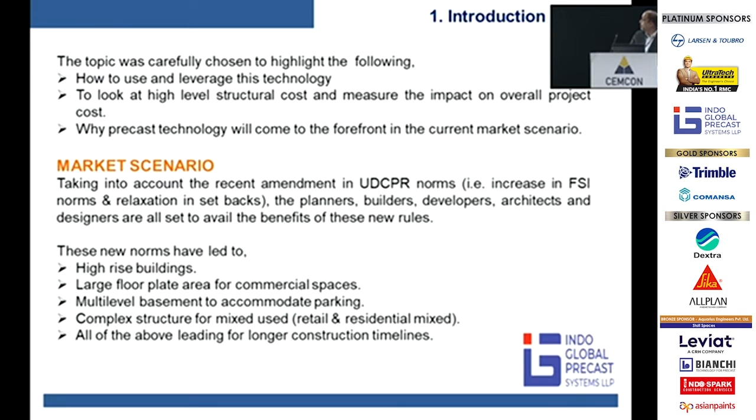Multi-level basements or multi-level podiums for parkings are being developed. Complex structures of mixed use, as retail and residential. These are also a type of buildings that you can see now. And all of these above are basically leading to longer construction timelines. We've also seen that the market is very volatile now, steep inflation, rise in price of steel, concrete, cement, aggregate, strands. The labor costs are also increasing.

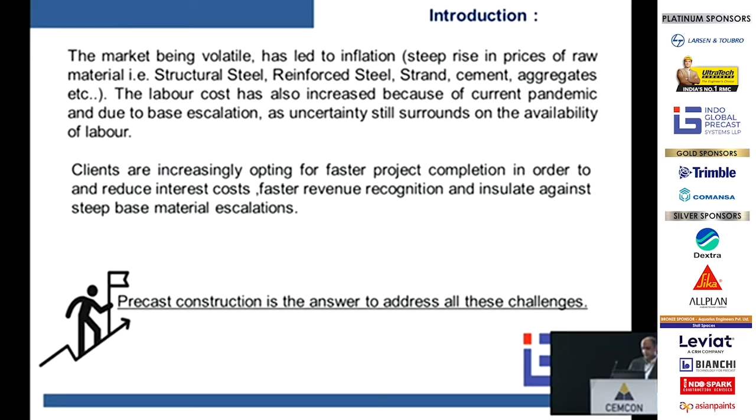And all these are leading to pressures on the clients. Clients are now opting for faster completion of projects in order to reduce interest costs, faster revenue recognition, and also in a way to insulate against base escalations. Another change has been RERA as a regulation, which has a fair amount of bite, and timelines are becoming more and more critical for everybody now. We've tried to show how precast can be leveraged by a couple of case studies.

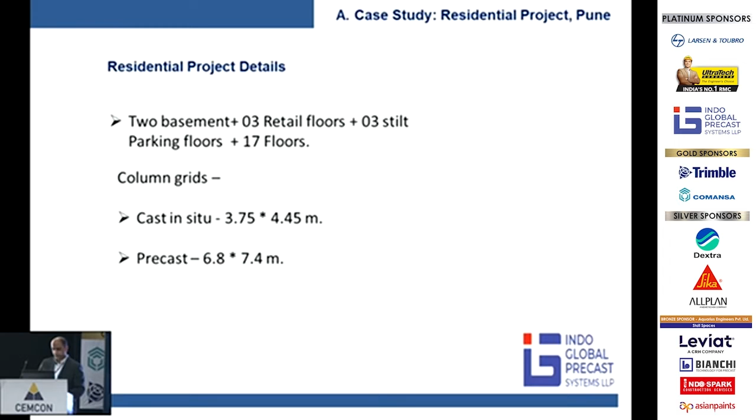The first case study is for a residential project. This is 2 basements, 3 retail floors, 3 stilts, and on top of that, 17 floors of residential. So this is the mixed-use buildings I was talking about. So earlier, the column grids were designed at 3.75 to 4.45 meters for in situ construction. For precast, we've changed that to 6.8 to 7.4. Now, this is a live project, and it's currently under design.

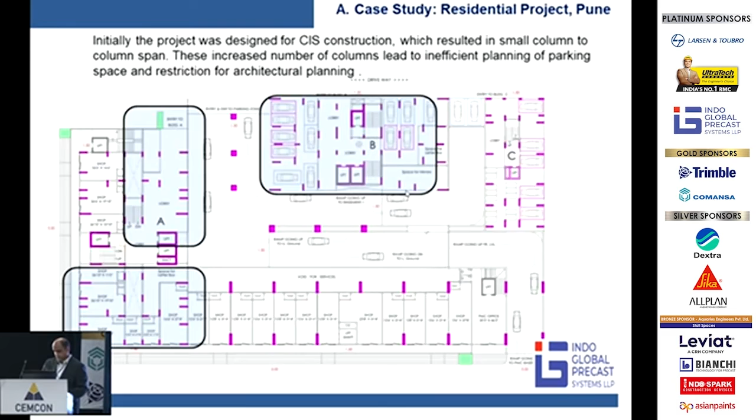So this was the original plan for the in situ construction. Now, we've highlighted the areas. So basically, these are the areas where columns for the residential buildings are coming down. And this is the retail component. What you can see is that this leads to a fair amount of inefficiency in dead spaces being created, limitations on the ramp locations, and also loss of a lot of built-up area. This is the structure above, just for reference.

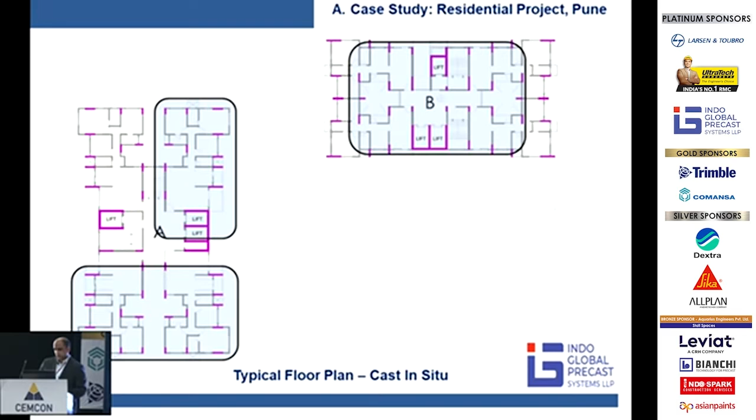We've taken this under precast, and the builder or developer is a friend of mine, and he approached us saying that something is wrong, the construction area is going out of whack. So we later on proposed a precast system for him, wherein we were designing it with a 6.5, 7 meter span. We were able to optimize the parking spaces, the parking built-up area, also planning it on a 6-meter grid gave him a fair amount of flexibility on the retail space as well.

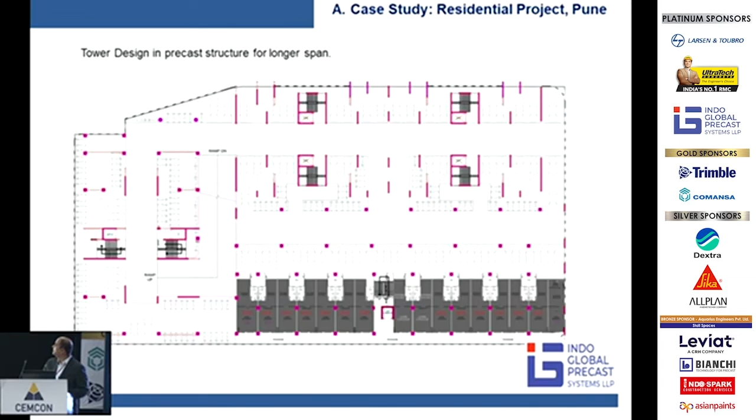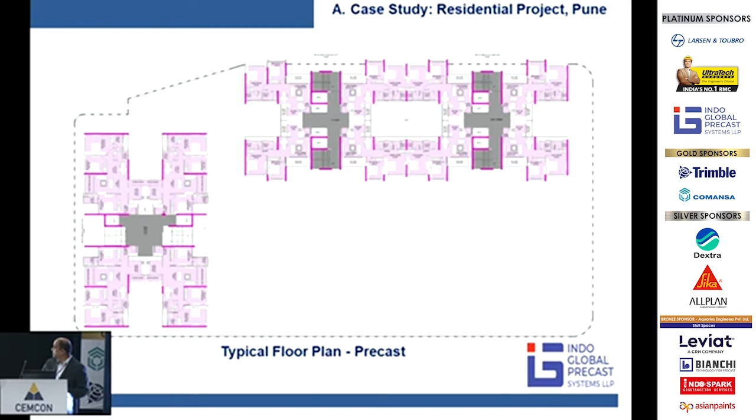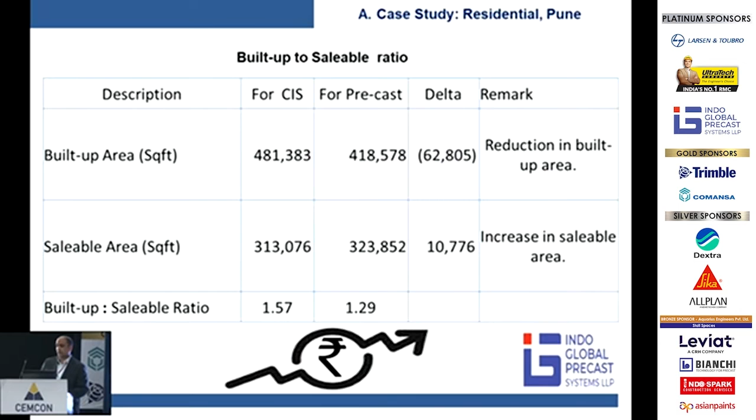And the overall saleable ratio went down from 1.57 to 1.29. Just a rough material consumption. Concrete consumption was 0.03 in cast in situ, very similar in the precast building. For reinforcement, it was 3.5 to 4 for a cast in situ; it will move to 3.2 to 3.5 for a precast. This 3.2 to 3.5 would include the strands in the hollow core slabs.

Overall costing for these buildings, with reference to cast in situ and precast, just to show you a cost behavior: the cast in situ building would cost up to 650 to 750 rupees a square foot. The precast building, yes, would be a little more expensive. It will go to 750 to 850 rupees a square foot. Another point to bear in mind is that the precast building will also include a fair amount of brickwork, blockwork quantity on the external sides, close to around 25%.

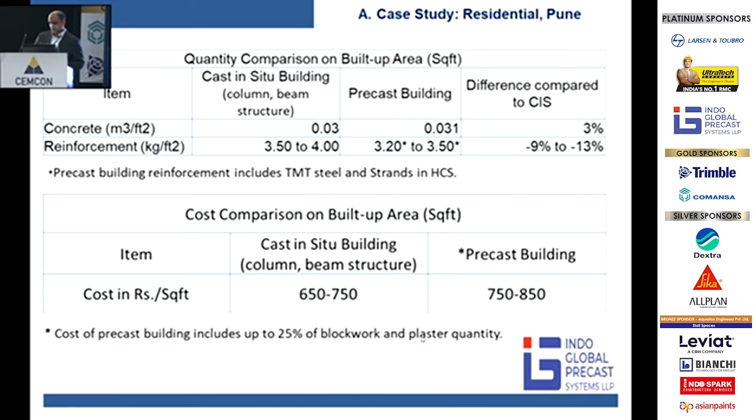I'm sure there will be a lot of questions, so I've taken the liberty of trying to predict a few myself. So the first question that we thought we might get is: is the same percentage area reduction applicable in all projects? Well, no. You will not have the same percentage reduction in all the projects. This is a complex mixed-use project, so there has been a fair amount of area optimization, but this would depend and vary from project to project.

What is the overall impact of precast structure on overall building cost? Pure construction versus overall product cost. So what we believe, and we'll see in detail later, is that looking at all the other benefits of precast, we should get a very similar costing, at least equivalent costing. What is the slab cycle that can be achieved in precast structures? Well, for a structure like this, we can achieve 10 to 12 day slab cycles without too much effort or too much stress.

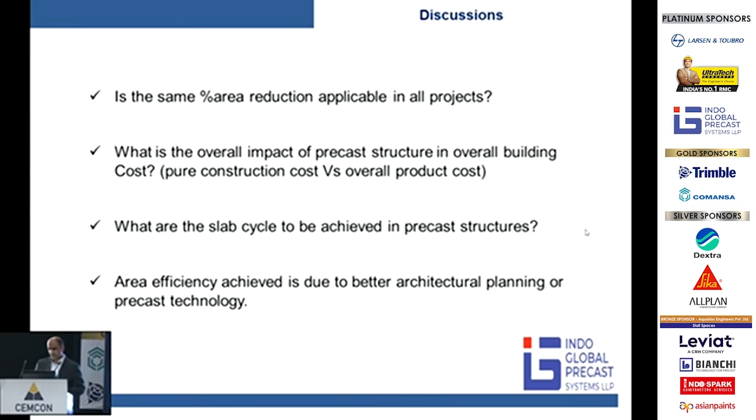And is area efficiency achieved due to better architectural planning or precast technology? I guess it's a mix of both. Precast will give you the option to design with longer spans, wherein it can help the architect achieve better efficiencies.

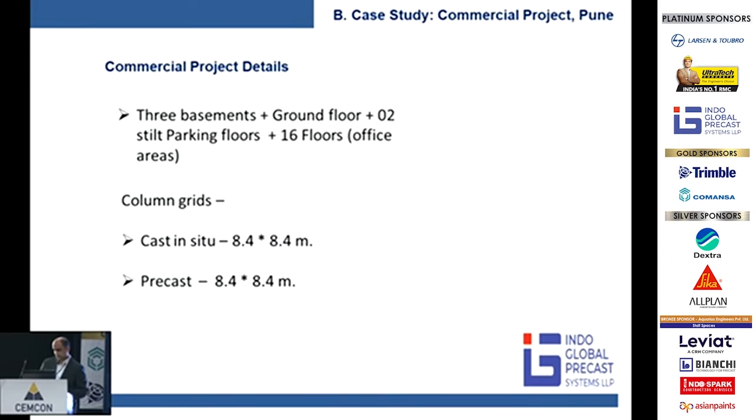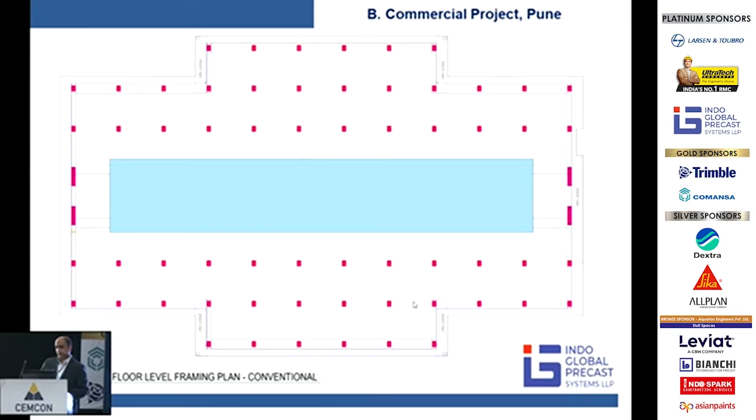The next is a commercial project. This is 3 basements, ground, 2 stilt floors, and 16 floors of office. The grids are the same for cast in situ and precast, 8.4 by 8.4 meters. Just to show you the floor plan. So this is a commercial building with 8.4 by 8.4 column span, central core, and an average of 2 to 2.5 meters cantilever along with a band beam.

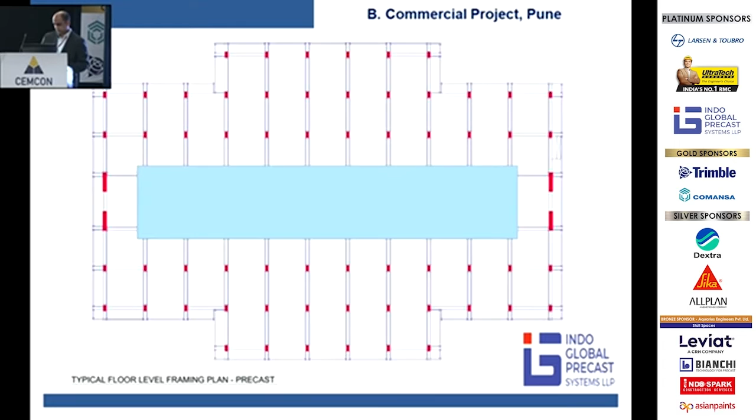This is the frame structure which we've done in precast, wherein there are unidirectional beams, outer band beams, and a certain amount of tie-back beams and framing beams for the cantilever portion. This is the basic behavior of the QS that we've seen. Concrete 0.04 for the cast in situ, whereas it's 0.036 for the precast. The reinforcement 4 to 5 kgs. Precast building we are closing in 2.75 to 3.5, and PT is 0.35 to 0.45 for the cast in situ. This increases in precast because of the hollow core slabs; it goes to 0.425 to 0.5.

You see a higher concrete saving in commercials because of the longer spans and larger size of hollow core slabs. So the larger the hollow core slab, the bigger the concrete saving. As far as the cost comparison is concerned, cast in situ buildings would probably finish between 700 to 800 rupees a square foot built-up area. Precast buildings would go up to 850 to 950.

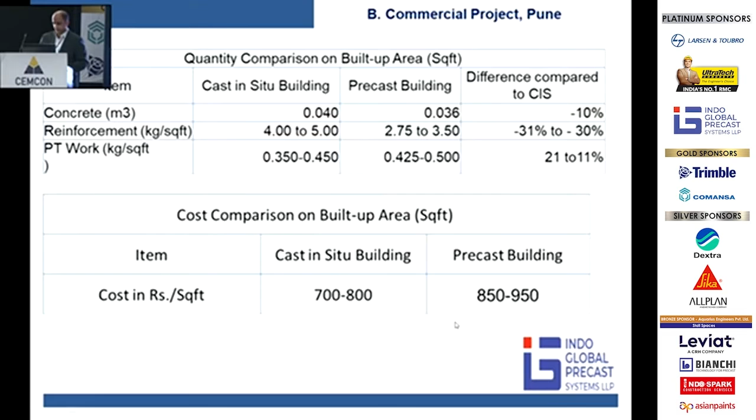Similar to the earlier slide, again, we have similar questions, such as what is the overall cost impact. I think we've covered that. Slab cycles achieved are also very similar. Can there be any efficiency area saving in commercial buildings? Well, at 8.4 by 8.4 meter grids, no efficiency can be achieved. Yes, the grids can be increased to 11 by 11, 11 by 8.5. There can be a certain amount of efficiency achieved in the parking areas.

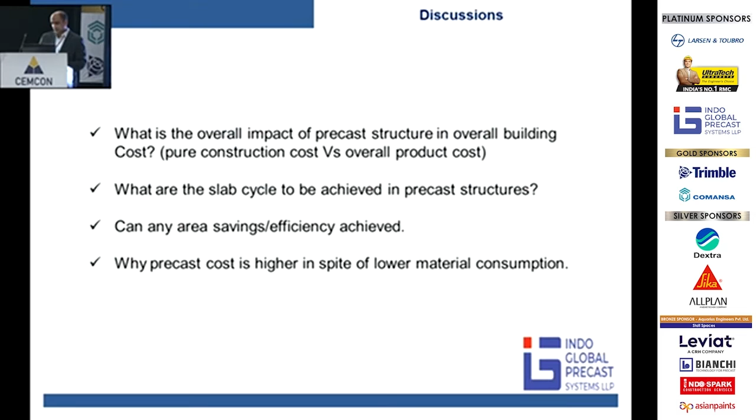Why is precast cost higher in spite of lower material consumption? Well, I guess a certain amount of it is due to the cost of technology, the cost of cranes, and also as precasters, I think we are yet to get into a factory environment wherein we are concentrating on production, and we are still stuck in a project environment. So I think we also have a big role to play over there. I think everybody's covered advantages of precast, so I shall quickly just take you through.

Speed, yes. Timeline reduction, you can get 30 to 40% savings. Lesser waste generated. The process is definitely immune to climate change; production does carry on even in the monsoons. Reduction in labor dependency, quality, safer working environments. Dependent activities in precast buildings can definitely start earlier, so an early start is possible for most activities which are on the critical path.

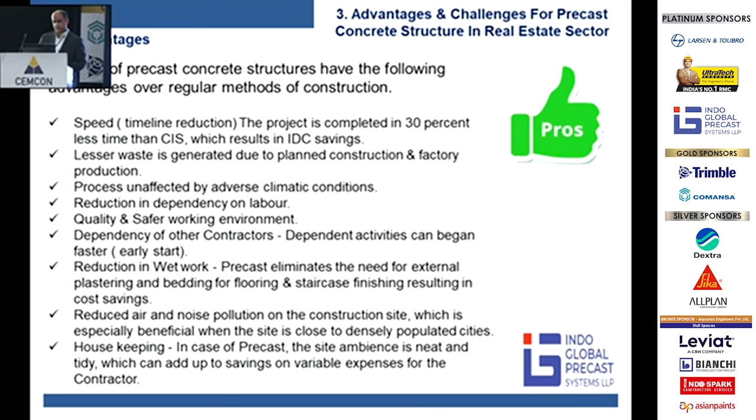Reduction in wet work is one major area which is also a big time saving and also good for housekeeping, where plastering, bedding for flooring in residential projects, and even staircase finishing can be eliminated and definitely help us in cost saving as well. Reduced pollution and housekeeping. There are some challenges that we face.

There is still a lack of consolidation in the real estate industry. What I mean to say is that our real estate industry is fairly unorganized, and a lot of construction does start without financial closure, which can lead to issues with the precast technology. Availability of higher capacity cranes; the population in India is not very high. Rental costs are still very high.

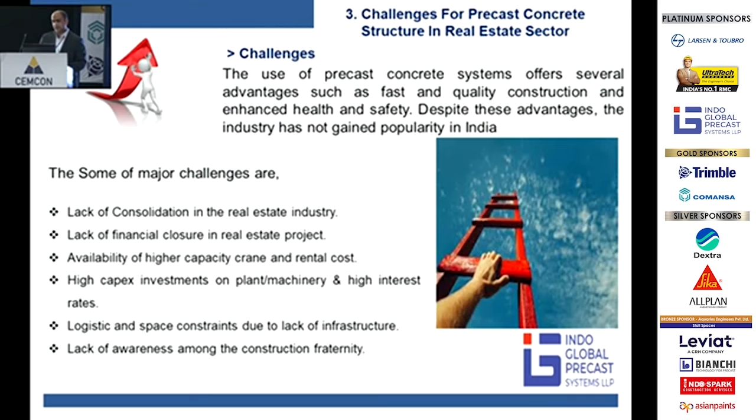High capex investment on plant and machinery, higher interest rates, where we are seeing a big drop, so that should be another big advantage for us. Logistic and space constraints due to lack of infrastructure is also an issue, and lack of awareness among the construction fraternity. How can we use and leverage this technology?

As far as residential projects go, use of higher spans to achieve a higher area efficiency is definitely one aspect which we've shown and can reap the benefits of. Reduction in wet work not only reduces cost, but drastically saves the overall project timeline. If external plaster can be eliminated, that is a big, big saving. Even bedding for tiling, brick bat coba for toilets: with good solid concrete slabs, there is absolutely no issue. You can directly move to membrane waterproofing and eliminate this activity, which is both time consuming and costly.

And speed. Speed definitely helps with your internal overhead costs, your faster revenue recognition, and basically to insulate yourself against any further inflation. So these are three ways we can use and leverage this technology to get an overall efficiency in cost. So even if the cost of a precast structure per se is slightly higher, we should be able to cover it up in the following areas.

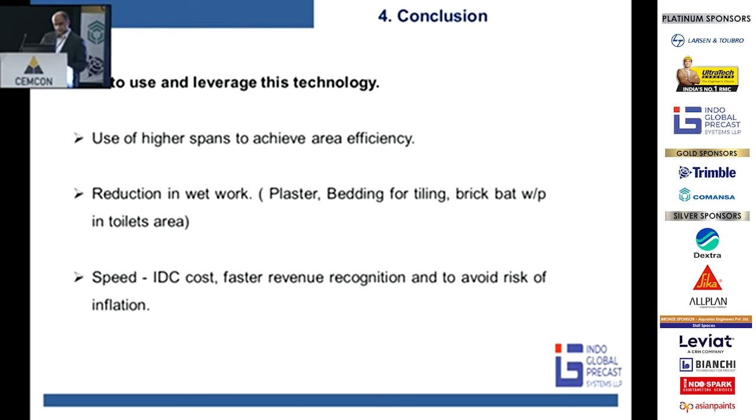To look at a high level costing, we've seen the cost of precast residential structures is anywhere from 10 to 20% higher than conventional structures. But this is just the structure cost. If you look at the overall cost, you have brickwork which gets offset, plaster which gets eliminated, bedding of tiling can be eliminated, staircase finishes can be done, timelines can be saved, and there's IDC reduction.

Further, be it residential or commercial, faster revenue recognition is a big thing. People have been quoting examples of starting rental 6 to 8 months earlier on leased buildings. That is a big, big saving and earning for them. And also inflation; we've seen huge inflation today. So if you look at the overall picture, we believe the overall cost should be equivalent or lower than a conventional structure.

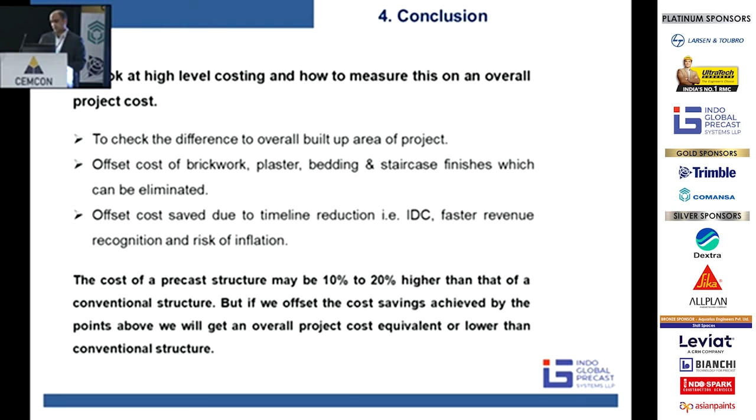And why do we believe this technology will come to the forefront? Consolidation is happening at a rapid rate. We have more and more organized developers now, and fair clarity on financial closures, so people are not starting projects without the funds to complete them today. Rising cost of labor and lack of availability is going to continuously bother us. Rising cost of raw materials, cement, strands: the more expensive these materials become, the more efficient precast buildings will be in comparison to in situ buildings.

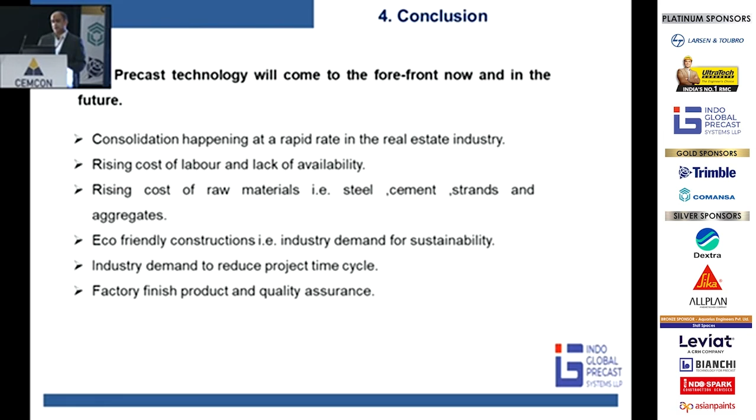Eco-friendly construction: there is an industry demand for sustainability. We're using less water, but we're definitely also using lesser steel, lesser aggregate, lesser cement, which would lead to more sustainable buildings. Industry demand for reduced project time cycle, and factory finished product and quality assurance, especially with legislation like RERA, which is forcing us to give 5-year warranties. I think this is definitely a major area of concern.

We are Allplan Precast, Allplan's global competence center for prefabrication. As our Design to Build motto suggests, we support you along the whole precast process, from the first cost estimate to the precast parts design and detailing, right up to generating accurate production data.

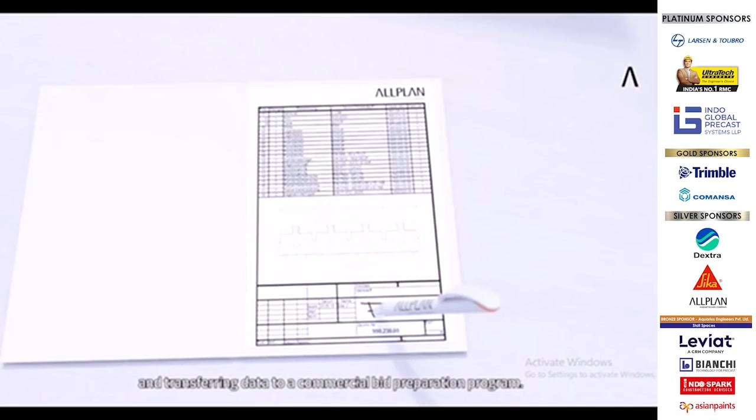With the model-based calculations within the Sales Manager, you have the tools you need to quickly and securely develop impressive bids. This sophisticated 3D model calculates volumes and quantities automatically from the building model, generating lists and graphical reports, and transferring data to a commercial bid preparation program.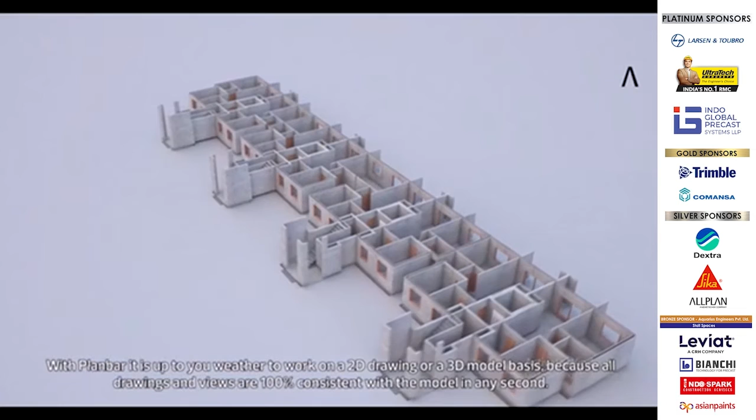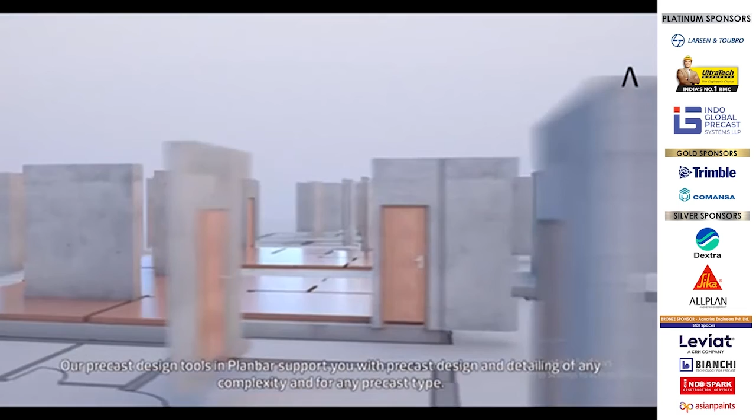PlanBar offers an ideal and unique synthesis of model and drawing-oriented work. With PlanBar, it is up to you whether to work on a 2D drawing or a 3D model basis, because all drawings and views are 100% consistent with the model in any second. Our precast design tools in PlanBar support you with precast design and detailing of any complexity and for any precast type. Numerous automated functions and integrated quality assurance enable optimum precast processes.

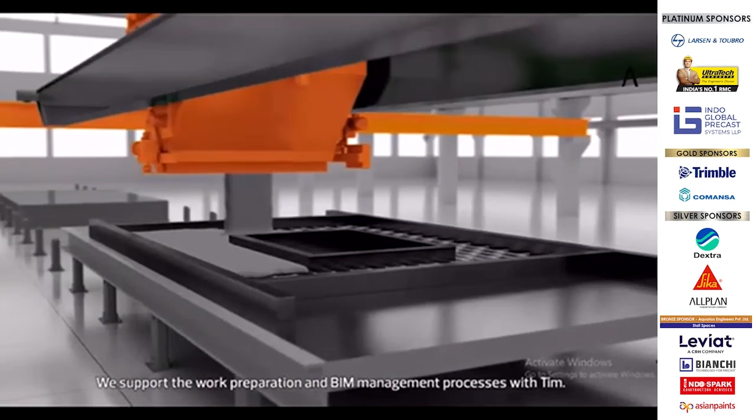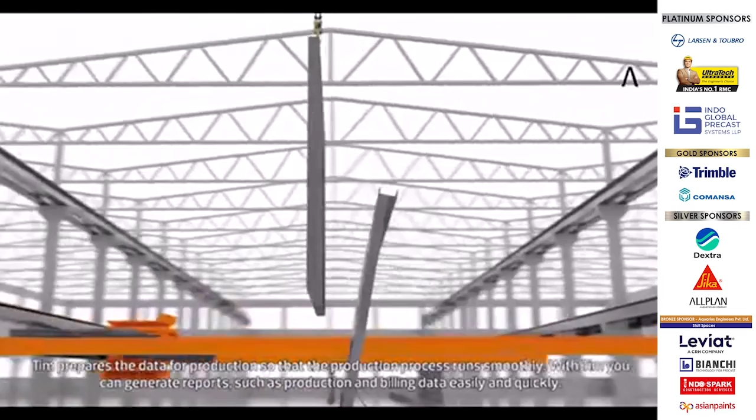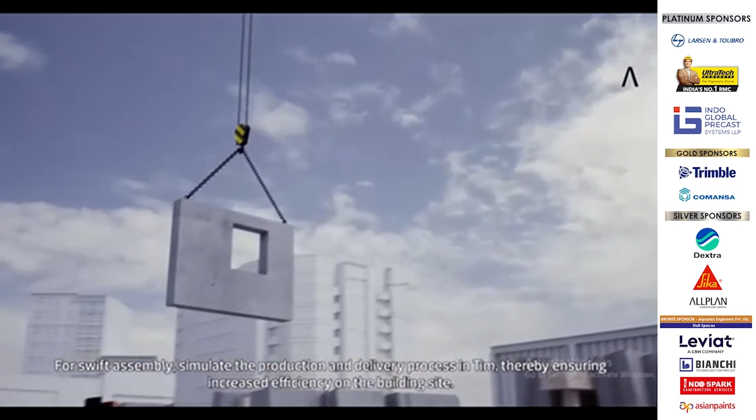We support the work preparation and BIM management processes with TIM, which prepares the data for production so that the production process runs smoothly. With TIM, you can generate reports such as production and billing data easily and quickly. The Delivery Manager module enables you to simulate the stacking of your elements in 3D. Plan your virtual transport racks directly from the 3D model or the list of elements. For swift assembly, simulate the production and delivery process in TIM, thereby ensuring increased efficiency on the building site.

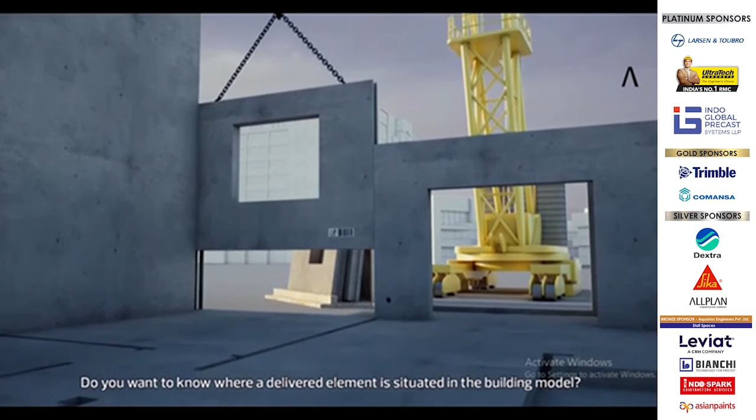Our mobile solution, MTIM, also supports you in the factory and on the building site with valuable and up-to-date information about the building project. Do you want to know where a delivered element is situated in the building model? Simply scan the barcode of the element and MTIM will immediately show you its position within the model. Visit our website to get more information about our high-performance software solutions and services for the precast industry.

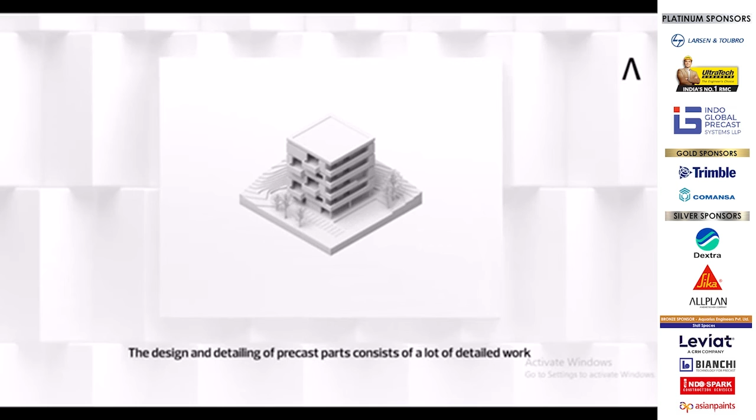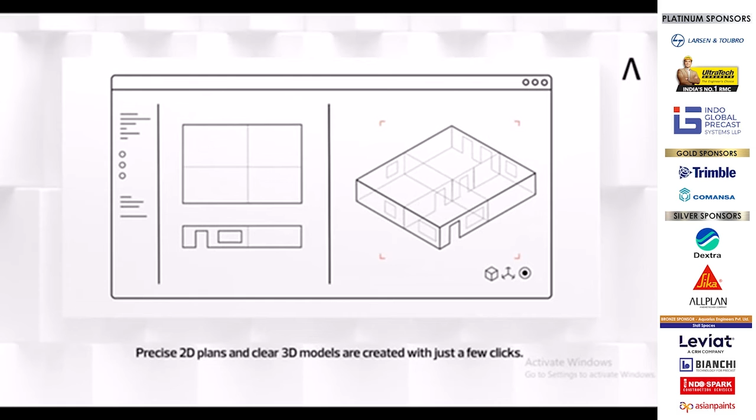The design and detailing of precast parts consists of a lot of detailed work and can therefore be time-consuming and error-prone without a solution like PlanBar. Allplan's smart design and detailing solution for precast parts maximizes your productivity with ease. Precise 2D plans and clear 3D models are created with just a few clicks. This is because automated workflows enable highly efficient and reliable planning.

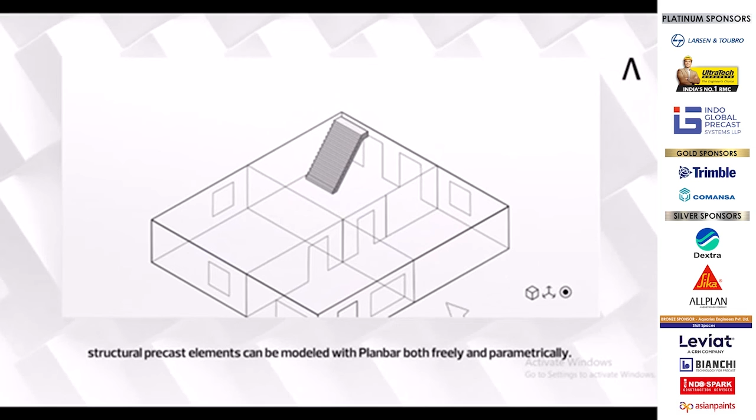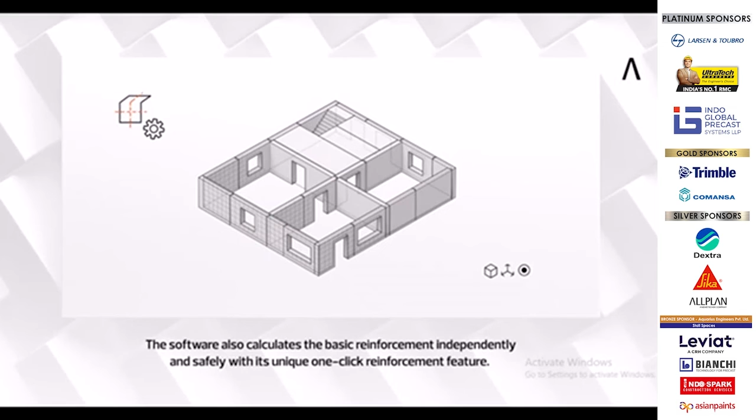Structural precast elements can be modeled with PlanBar both freely and parametrically. Walls and slabs are quickly imported, analyzed, and planned. PlanBar automatically takes care of the intelligent division into producible and deliverable units. The software also calculates the basic reinforcement independently and safely with its unique one-click reinforcement feature.

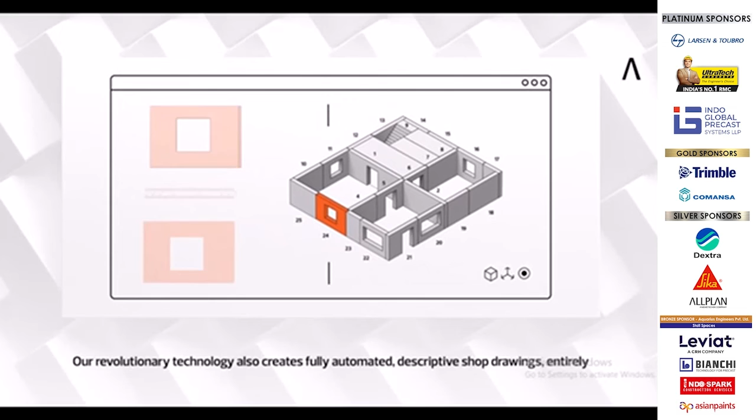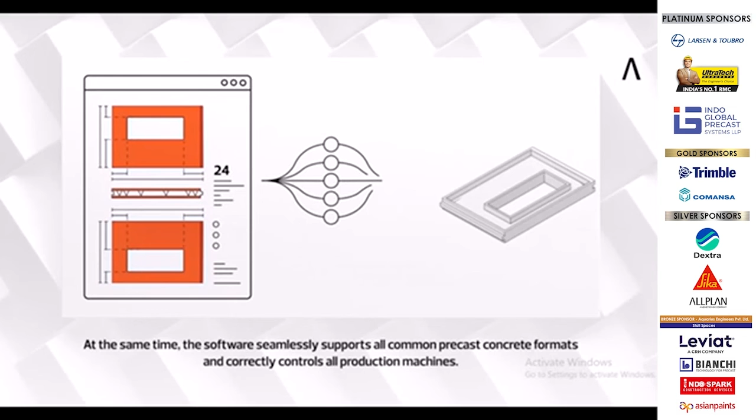Our revolutionary technology also creates fully automated descriptive shop drawings, entirely according to your specifications and for the specific requirements of the respective production step. All plans in PlanBar are also 100% consistent with the model at all times and therefore reliable. At the same time, the software seamlessly supports all common precast concrete formats and correctly controls all production machines.

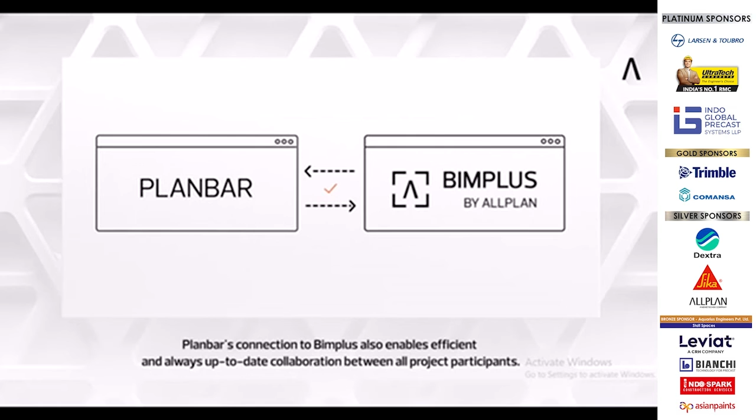Thanks to the linking of reinforcement, concrete and fixture geometry, PlanBar calculates the weight and exact centers of gravity of all precast elements while still in the planning phase, thus safeguarding subsequent truck and crane work. PlanBar's connection to Bimplus also enables efficient and always up-to-date collaboration between all project participants. With unique automated and smart workflows, PlanBar takes your precast design and detailing to a new level of precision and efficiency. Choose one of the world's leading precast BIM solutions. Choose PlanBar.

We will continue our story with the family garage. The house is almost ready and the family is eager to move their cars into the garage, so it needs to be built as fast as possible. Therefore, the family opts for prefabrication. This is where PlanBar, Allplan's precast detailing solution, comes into play.

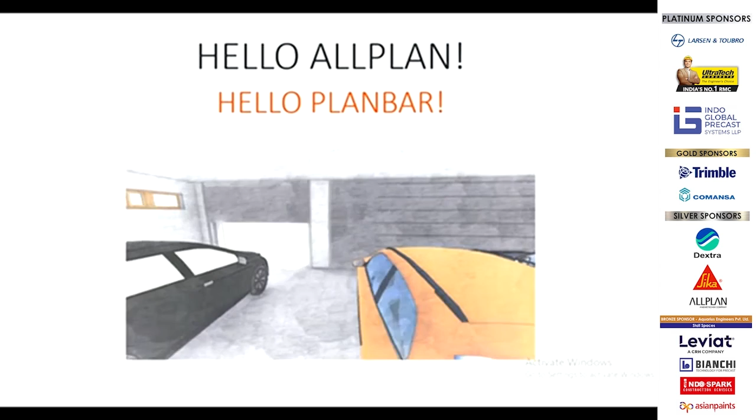PlanBar is an independent product, but uses Allplan as its technical basis. So, for Allplan users, the user experience will be very familiar. The software enables you to manage all your precast projects with the utmost efficiency and precision. PlanBar has dedicated modules that convert any 3D architectural model from Allplan or other CAD software into precast elements.

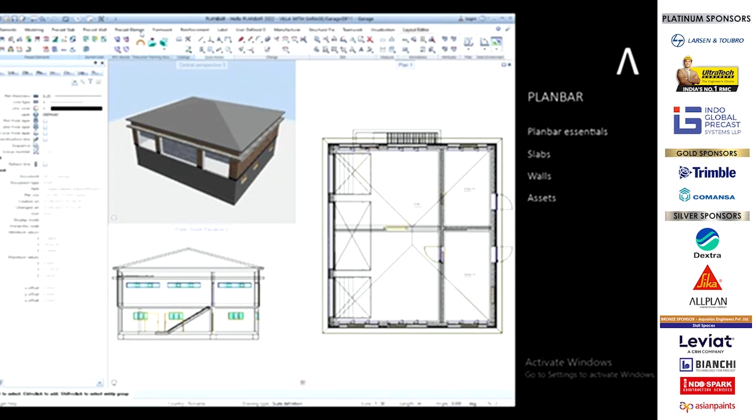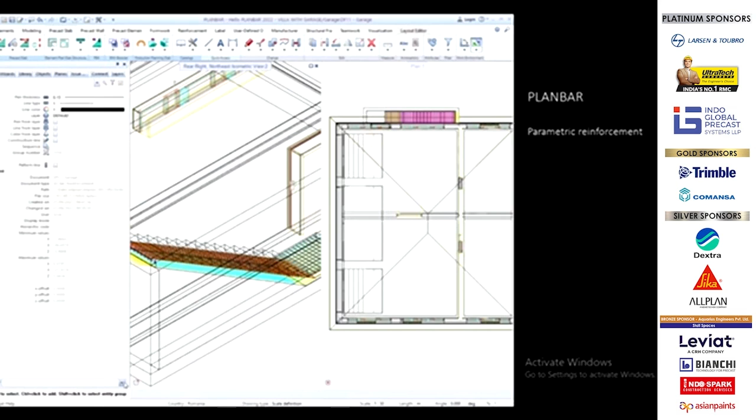Let's take this prefabricated staircase, for example. Technology such as PythonParts allows the easy conversion of a classic staircase into a precast one by introducing specific supports and also adding parametric reinforcement. Using the Precast Elements module, we can convert any 3D object into a precast element. Detailing the element is one click away.

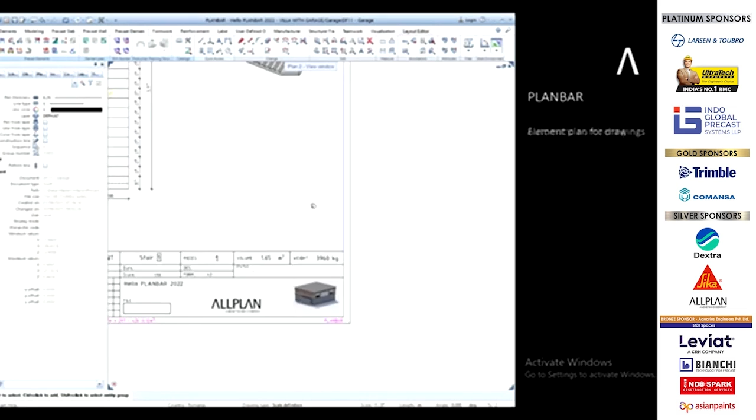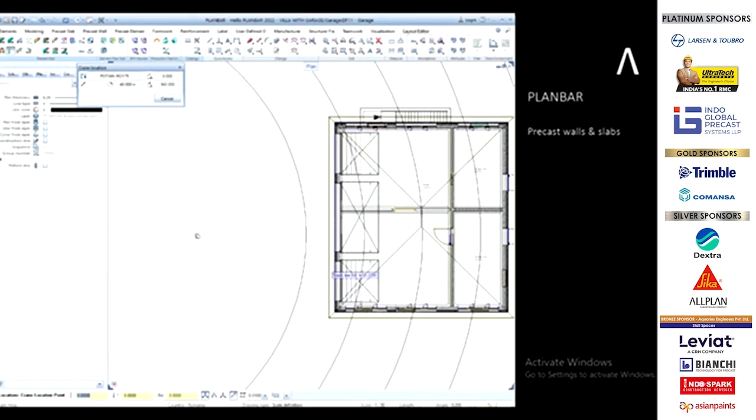We will use PlanBar's unique element plan tool to generate automatic formwork drawings, fixture positionings, and reinforcement plans with bar bending schedules. What about walls and slabs? Does PlanBar offer a smart solution for optimizing the detailing and production of walls and slabs that are produced in highly automated manufacturing environments? The precast slab and precast wall tools are the perfect solution for this situation.

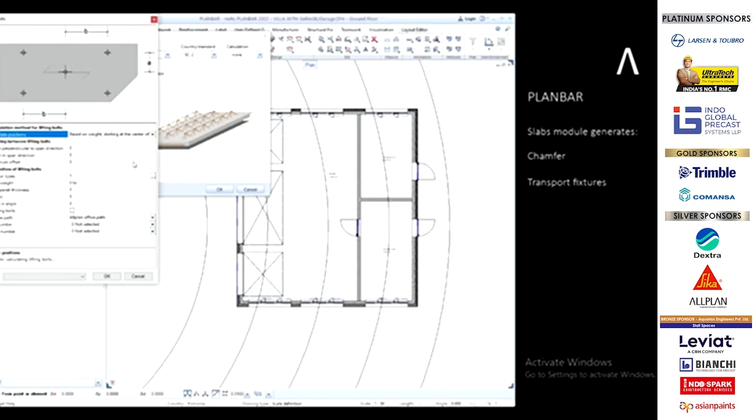Both start with choosing where to position the crane, just like reality. We will choose a crane positioning point. The software will display the available lifting capacity as determined by the crane leverage arm. The software enables the definitions of multiple types of slabs. By choosing the desired design parameters, the software will divide, chamfer, place the transport fixtures and reinforce the slab automatically, while still giving you the possibility of making manual changes for the final optimal solution.

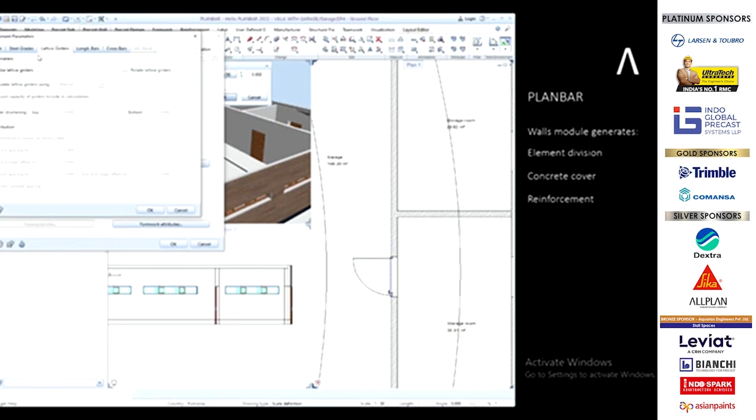The same approach is used for the walls. As you can see, all requirements regarding element division, concrete cover, and even reinforcement are taken into consideration. The result is a conversion of a large concrete wall into several precast walls that can be produced and assembled on site according to contractors' possibilities.

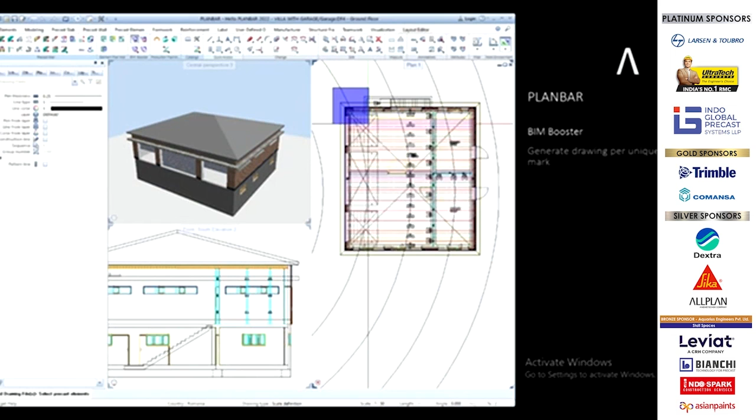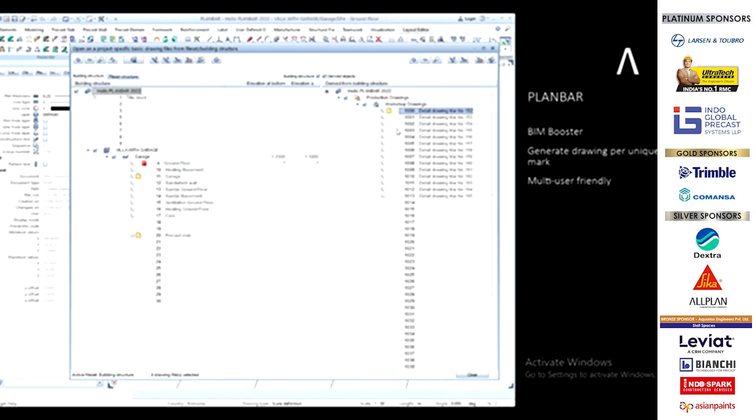3D precast element creation is easy, but what about the detailing? Is there a fast way to generate the detailed drawings? BIM Booster is the answer. This module allows you to generate the unique elements with automatic detailing. This way, you will always know how many unique elements need detailing and, at the same time, it allows multiple users to access and edit this information in real time. The automatic drawings can be modified, elements reinforced and fixtures inserted even after the drawings are generated with BIM Booster.

Thanks to the check plausibility and synchronize model and detail tools, your global model is always up to date. Changes regarding formwork, fixtures and reinforcement can be transferred from global model to detailed drawings. The other way around is also possible. Modifications from detailed drawings can be transferred to the 3D global model.

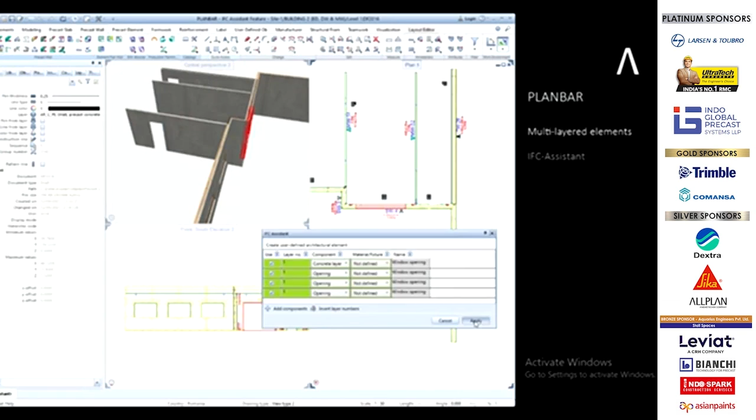If you need to design and detail complex sandwich walls or multi-layered elements, there is a tool specifically for dealing with such elements. IFC Assistant enables you to group multiple materials to form a single precast element with a unique mark and obtain a high-quality production drawing.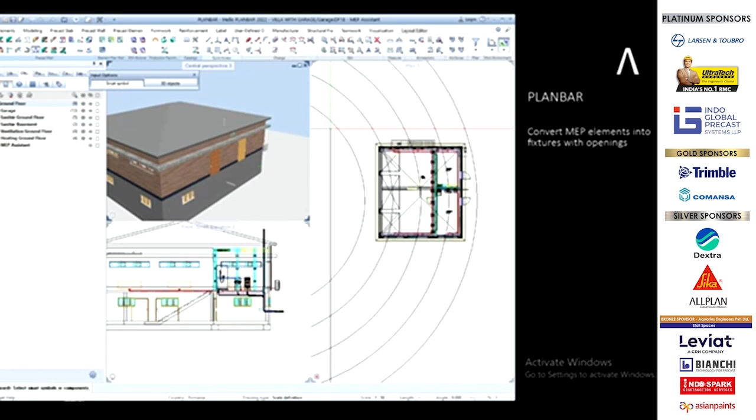The MEP Assistant is an open BIM feature and enables you to convert your MEP objects into PlanBar data. Simply align the imported objects with the available items in your MEP library. The tool will generate the required openings according to the fixture's requirement in order to avoid clashes with the structural elements.

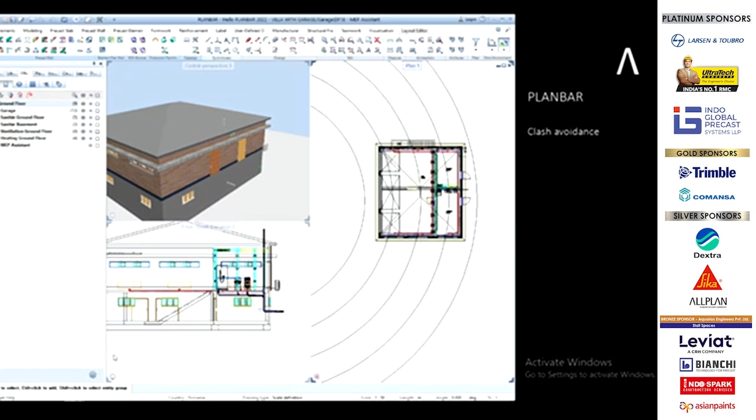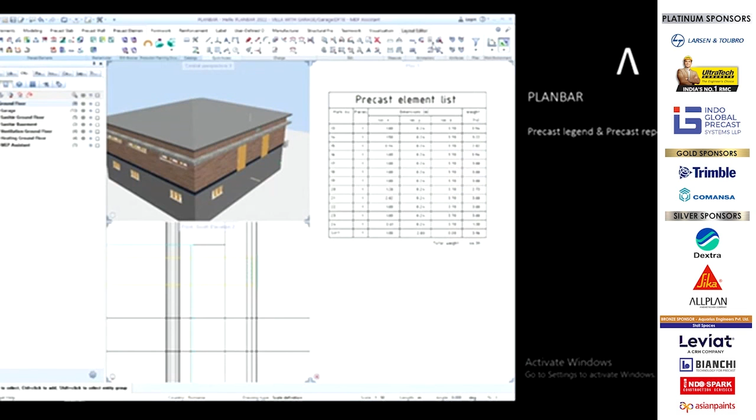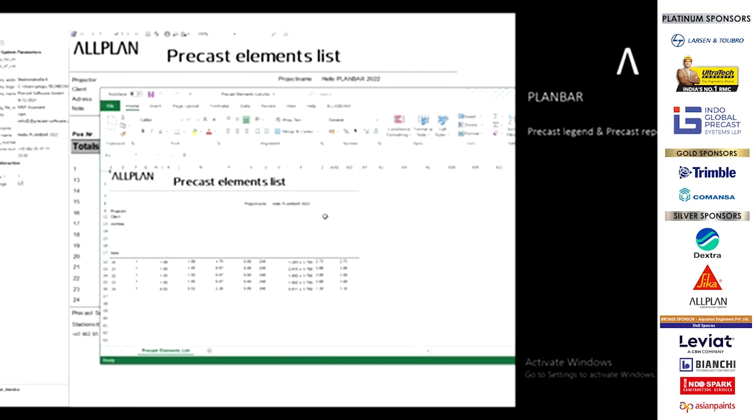At any time, you can generate a legend or a report with the precast elements used in your current project. The advantage here is being able to get multiple quantities, such as number of precast elements, volume and mass for each unique precast element mark. All this BIM data can be exported for production use with Allplan's work preparation and BIM management solution TIM. TIM's smart features ensure that the factory receives all the required information for production to the quality standard required.

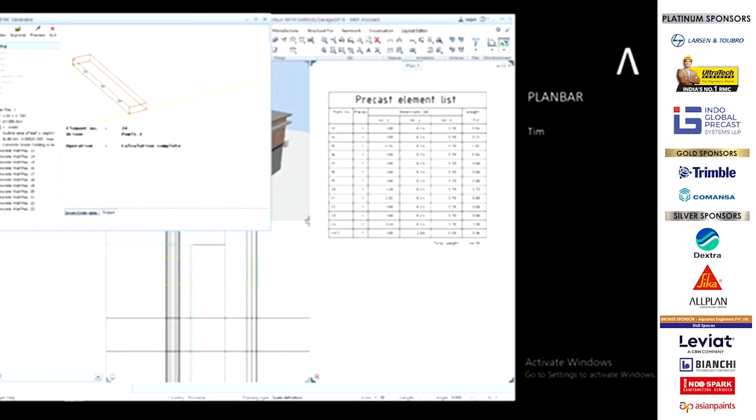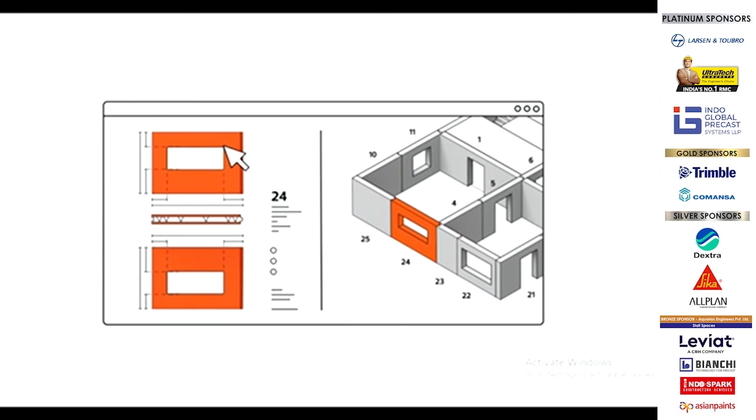PlanBar is Allplan's unique BIM solution specifically for precast projects. PlanBar takes your precast design and detailing processes to a new level of efficiency and precision. Design walls, slabs, and structural precast elements such as stairs faster and more accurately than ever before.